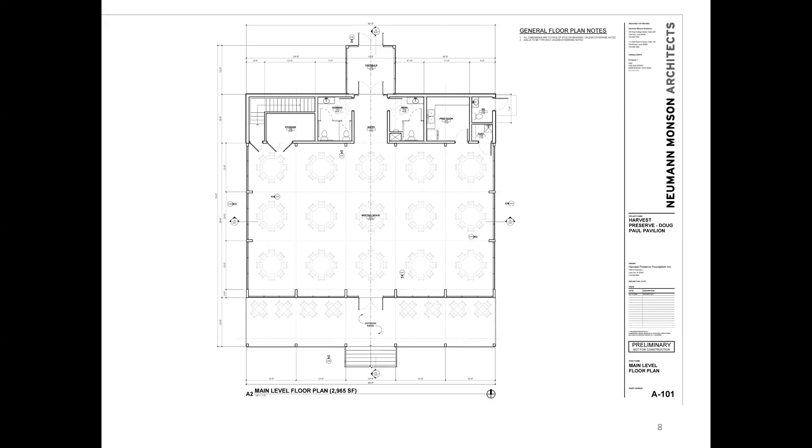Here's a look at the floor plan for the main level. This is intended to be a meeting space with also providing restrooms and storage area, as well as the screened porch.

Here's a look at the lower level of the plan. The building is proposed as a walkout basement, which will be storage area as well.

The role of the Board of Adjustment: the Board of Adjustment is charged with approving with conditions, or denying the application based on the facts presented. To approve the special exception, the board must find that it meets all applicable approval criteria.

For this we use two sets of standards: specific standards pertaining to the use requested, and general standards that we use for all special exceptions. For our specific standards, we'll use 4B4D17 of the code, which is for a religious or private group assembly in the IDRS zone.

The first standard is related to the required setbacks. The following setbacks are required in lieu of the setbacks specified in the base zone: the proposed building must be set back 20 feet from the front lot line, 20 feet from the side, and 50 feet from the rear lot line.

However, the board may reduce these setbacks subject to the approval criteria for setback adjustments as specified in subsection 14-2A-4B5, our adjustments to principal building setback requirement subsection of this title.

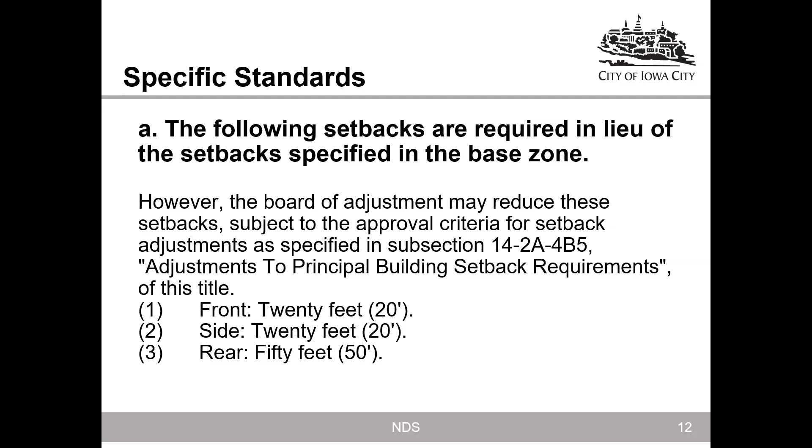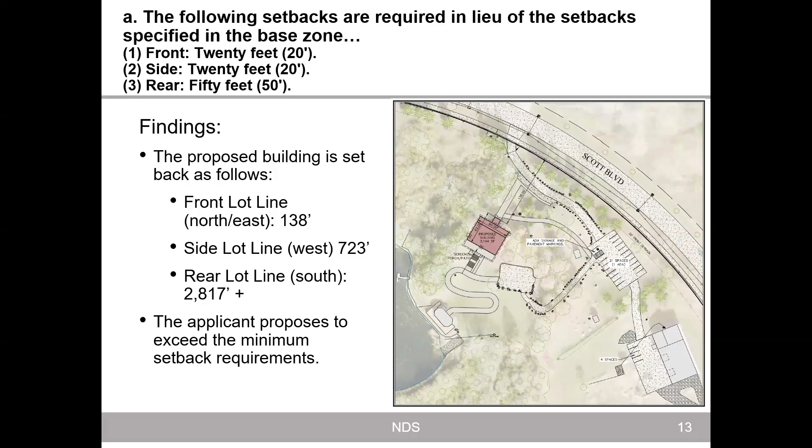The proposed building is set back 138 feet from the front lot line, 723 feet from the side lot line, and over 2,800 feet from the rear lot line. So the applicant proposes to exceed the minimum setback requirements.

The next standard: the proposed use will be designed to be compatible with adjacent uses. The Board of Adjustment will consider aspects of the proposed use, such as the site size, types of accessory uses, anticipated traffic, building scale, setbacks, landscaping, and the location and amount of paved areas.

The board may deny the use or aspects of the use that are deemed out of scale, incompatible, or out of character with surrounding residential uses, or may require additional measures to mitigate these differences. Additional requirements may include, but are not limited to, additional screening, landscaping, pedestrian facilities, setbacks, location and design of parking facilities, and the location and design of buildings.

Staff find that the use would provide an indoor meeting space and restrooms for its members for the purpose of education, training, leisure, and shelter. This private group assembly use is primarily for use by its members, typically restricts access to the general public, and cannot be rented to commercial office uses or for events held by the general public.

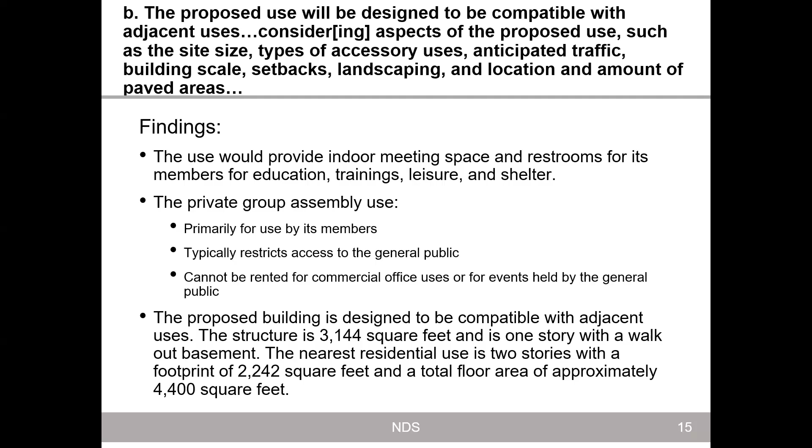The proposed building is designed to be compatible with adjacent uses. The structure is 3,144 square feet and is 1 story with a walkout basement. The nearest residential use is 2 stories with a footprint of 2,242 square feet and a total floor area of approximately 4,400 square feet.

We also consulted with transportation staff, who determined that the proposed use and associated traffic will not overburden Scott Boulevard, noting that, according to Iowa state data, the street currently carries approximately 5,100 vehicles per day and has the capacity to exceed 15,000 vehicles per day.

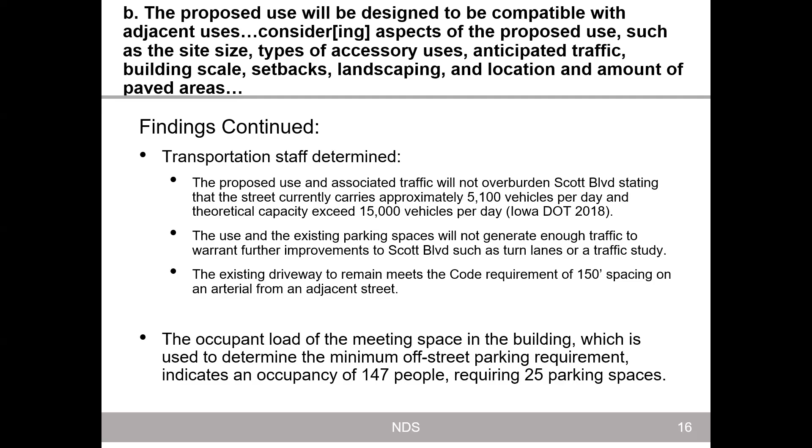Transportation staff also found that the use and the existing parking spaces will not generate enough traffic to warrant further improvements to Scott Boulevard, such as turn lanes or a traffic study. The existing driveway is set to remain and meets the code requirement of 150 feet spacing on an arterial from an adjacent street. Lastly, the occupant load of the meeting space in the building, which is used to determine the minimum off-street parking requirement, indicates an occupancy of 147 people, which requires 25 parking spaces.

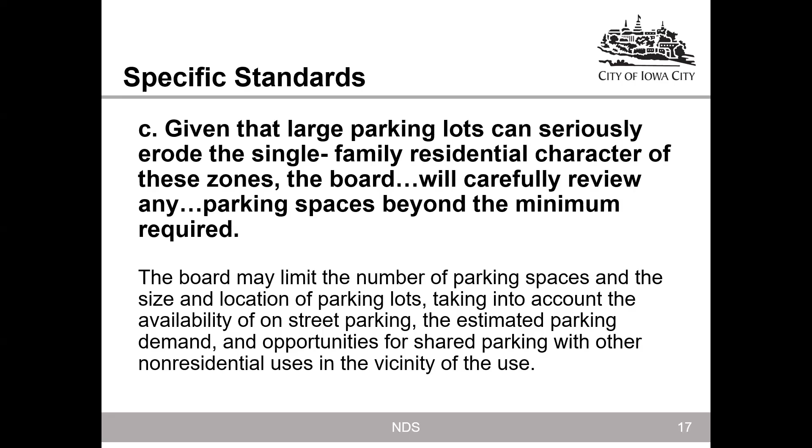The next standard: given that large parking lots can seriously erode the single-family residential character of these zones, the board will carefully review any parking spaces beyond the minimum required. The board may limit the number of parking spaces and the size and location of parking lots, taking into account the availability of on-street parking, the estimated parking demand, and opportunities for shared parking with other non-residential uses in the vicinity of the use.

The proposed use requires a minimum of 25 parking spaces. Parking spaces for a religious or private group assembly use is determined by the largest room's occupancy, which is 147 people. The property contains 2 existing paved areas that are capable of being striped for the required 25 parking spaces.

The existing driveway located along the northeast side of the property will be used. No improvements to the drive are proposed as part of this application. Bike parking will also need to be provided and reviewed during the site plan review.

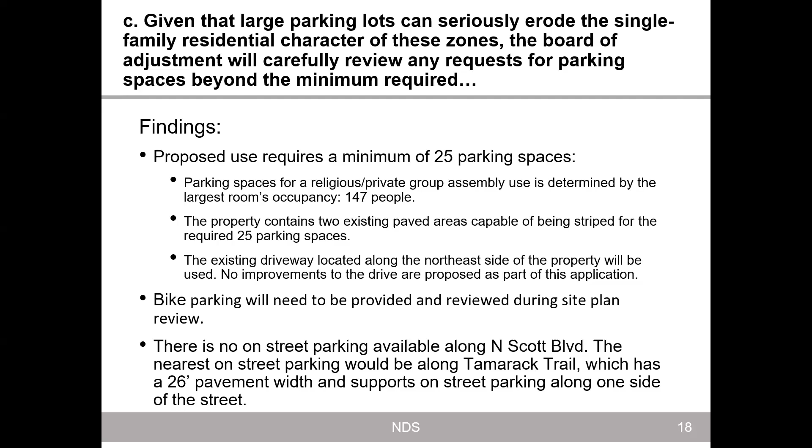There is no on-street parking available along North Scott Boulevard. The nearest on-street parking would be along Tamarack Trail, which has a 26-foot pavement width and supports on-street parking along one side of the street.

The next standard: the proposed use will not have significant adverse effects on the livability of nearby residential uses due to noise, glare from lights, late night operations, odors, and litter. The closest residential property from the proposed use is located 723 feet to the west and separated by woodlands.

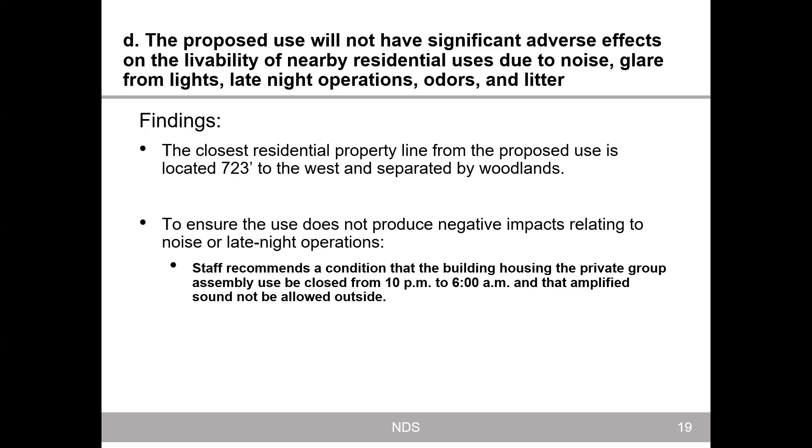To ensure the use does not produce negative impacts relating to noise or late night operations, staff is recommending a condition that the building housing the private group assembly use be closed from 10 p.m. to 6 a.m. and that amplified sound not be allowed outside.

Single-family and ID-RS zones are in the low illumination district, which is the lowest lighting district within our code. However, the ID-RS zone properties are not subject to the same lighting restrictions as single-family uses, and due to the proximity to existing single-family uses and the specific approval criteria that the use be designed to be compatible with adjacent uses, staff is recommending the condition that any future lighting be subject to the standards of 14-5G-3, which is our standards for single-family and two-family uses to ensure compatible lighting designs.

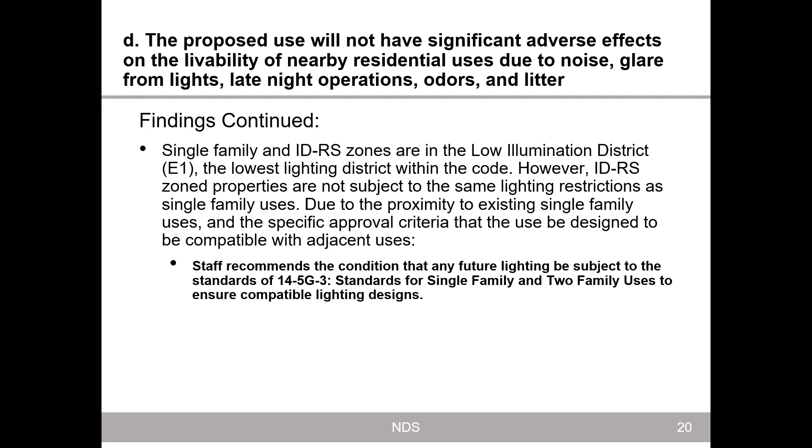The next standard is related to building additions and accessory structures. The building official may grant approval for the following modifications to a private group assembly use without approval from the Board of Adjustment. This section is not applicable because the proposed use is new and a special exception is required.

The final standard here is if the proposed use is located in a residential zone or in the central planning district, it must comply with the multifamily site development standards as set forth in section 14-2B-6 of this title. We find that the proposed use is located within an interim development zone, which is outside of the central planning district and not subject to the multifamily site development standards.

That brings us to our general standards that we use for all special exceptions. First, the board must find that the specific proposed exception will not be detrimental to or endanger the public health, safety, comfort, or general welfare.

Staff find that the proposed building will generally be of a comparable scale to surrounding residential uses, and the applicant proposes an increased setback to maintain separation from existing development.

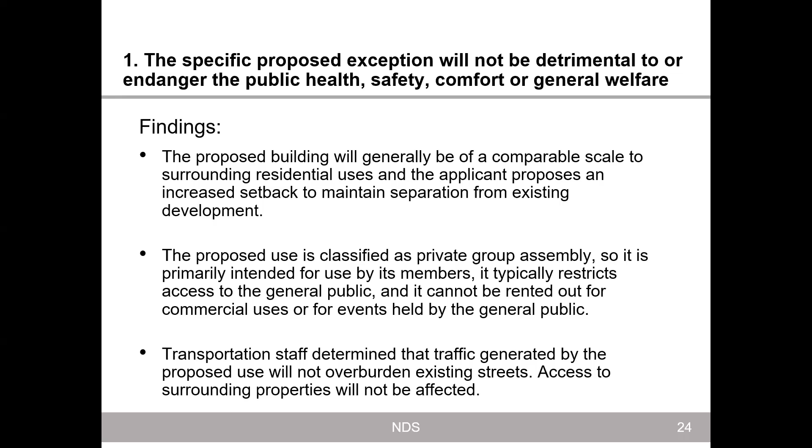Transportation staff also determined that traffic generated by the proposed use will not overburden existing streets, and access to the surrounding properties will not be affected.

Staff also find that the proposed building would provide an amenity to enhance the visiting experience for members, programs, and camps, while also acting as a safety shelter when necessary.

Conditions for noise and lighting have been proposed to ensure the proposed use remains compatible with surrounding developments so as not to impede on the health, safety, comfort, or welfare of the public.

Next standard: the specific proposed exception will not be injurious to the use and enjoyment of other property in the immediate vicinity and will not substantially diminish or impair property values in the neighborhood.

Our findings: the proposed use will not impact the ability of neighbors to utilize and enjoy their properties. The proposed building is located approximately 723 feet from the nearest residential property line to the west.

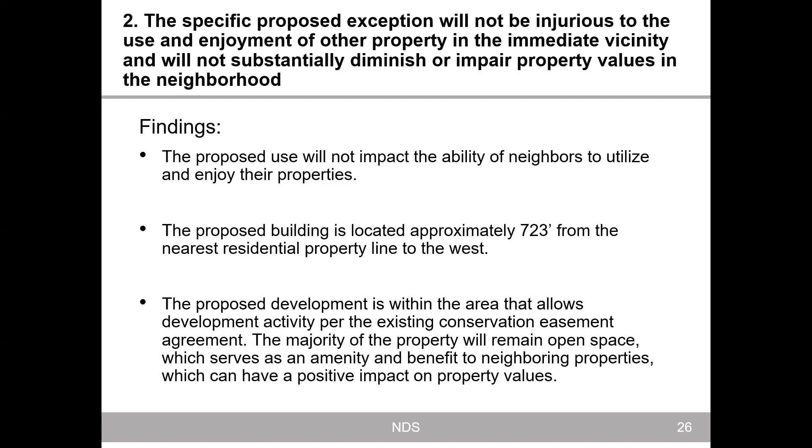The proposed development is also within the area that allows development activity per the existing conservation easement agreement. The majority of the property will remain open space, which serves as an amenity and benefit to neighboring properties, which can have positive impacts on property values.

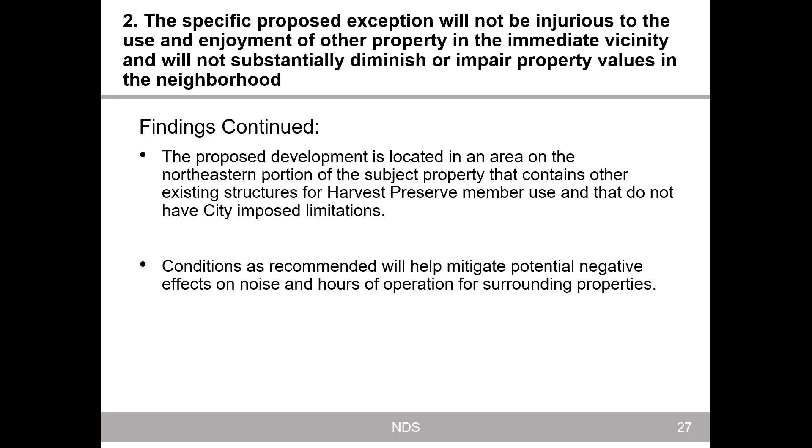Staff also find the proposed development is located in an area on the northeastern portion of the subject property that contains other structures for Harvest Preserve member use and that do not have city-imposed limitations. Conditions, as recommended, will help mitigate potential negative effects on noise and hours of operation for surrounding properties.

So the next standard: establishment of the specific proposed exception will not impede the natural and orderly development and improvement of the surrounding property for uses permitted in the district in which such property is located.

The residential neighborhood to the west is nearly fully developed with residential uses. Land to the north and east of the subject property remains undeveloped. The development of this land will occur as utilities are extended and development continues from the west.

The proposed use will also be set back 723 feet from the existing residential neighborhood and be compatible in scale. The conditions, as recommended, mitigate potential effects for surrounding properties.

The next criteria: the board must find that adequate utilities, access roads, drainage, or necessary facilities have been or are being provided. The subject property has access to city utilities and will extend utilities to serve the new building. There's also an 8-foot wide sidewalk existing along the property's North Scott Boulevard frontage, and pedestrian access for visitors of Harvest Preserve through on-site trails. Lastly, a large portion of the subject property is green space, which allows for absorption of stormwater runoff.

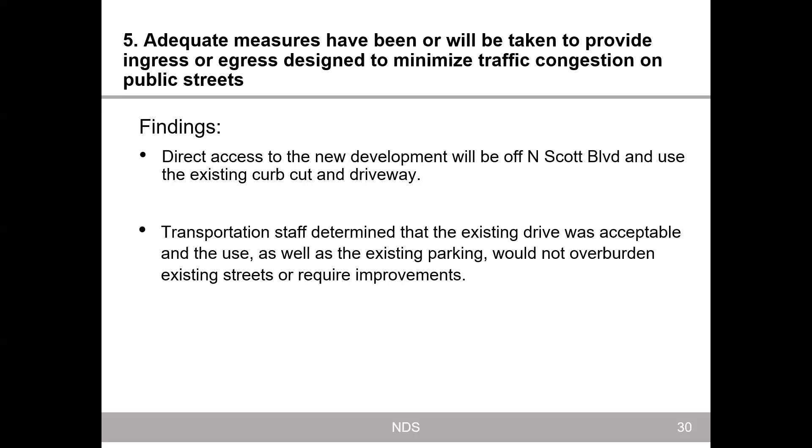The next standard: adequate measures have been or will be taken to provide ingress or egress designed to minimize traffic congestion on public streets. Direct access to the new development will be off North Scott Boulevard using the existing curb cut and driveway. Transportation staff determined that the existing drive was acceptable, and the use and existing parking would not overburden existing streets or require improvements.

The next criteria: except for the specific regulations and standards applicable to the exception being considered, the specific proposed exception in all other respects conforms to the applicable regulations or standards of the zone in which it is located. The proposed use and development meet all applicable code standards of the ID-RS zone.

And that brings us to our last standard: the proposed exception will be consistent with the comprehensive plan of the city as amended. Starting with the future land use map, the comprehensive plan shows this area as conservation design. We also look to the Northeast District Plan, which identifies this property as the Bluffwood neighborhood.

On page 27 of the comprehensive plan, it notes that conservation design is appropriate in areas containing sensitive features, meant to balance protection of sensitive natural features with the development rights of property owners. By clustering development on more buildable portions of the property, natural areas can be preserved. The proposed use and building would be located in the northeast corner of the property, away from sensitive areas and in a designated buildable area per the conservation easement.

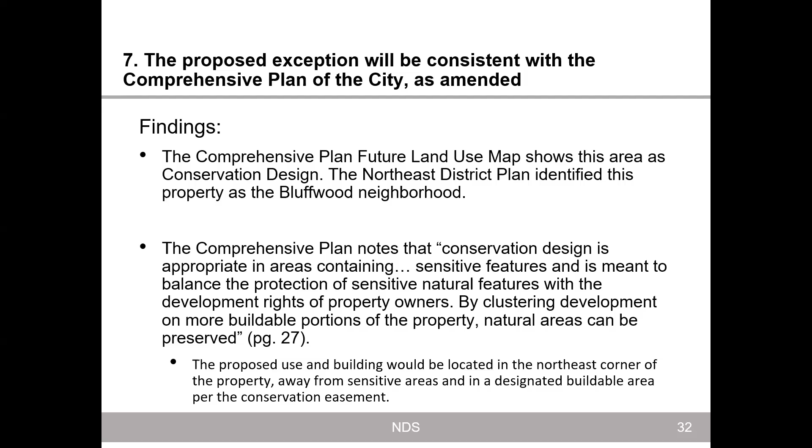Moving on to the Northeast District Plan, page 8 states a goal to use conservation design principles to locate streets, utilities, and structures in a way that minimizes disturbance to natural features.

Although the street network is currently built out, in recent years city utilities have been extended to a location more suitable to limit disturbance to natural features while providing the property with proper utilities.

Lastly, page 8 of the Northeast District Plan also has the goal to treat environmentally sensitive areas as amenities. The Harvest Preserve Foundation has placed a portion of its 100 acres into a private conservation easement for the long-term protection of natural features, with the intent of raising public awareness, appreciation, and participation. The proposed use and building would provide an indoor space intended to further support and enhance the nature amenities and those who visit.

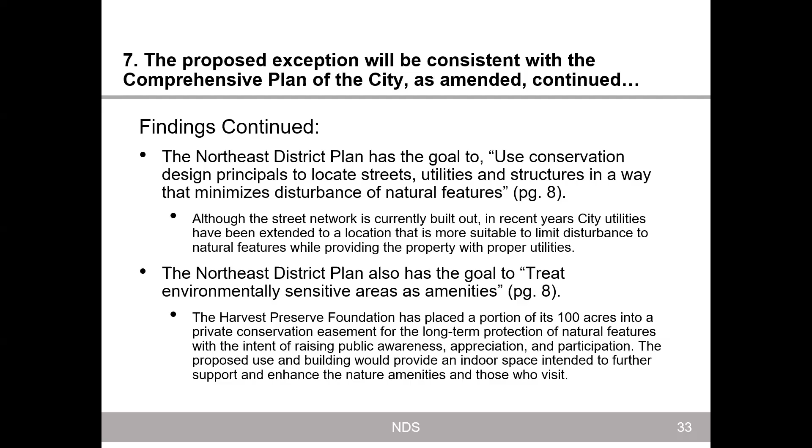Staff received 2 pieces of correspondence following publication of the agenda packet. Both of these were in opposition, and there are hard copies available.

That brings us to our staff recommendation. Staff recommends approval of EXC26-0001 to allow a private group assembly use in an interim development single-family residential zone for the property located at 1645 North Scott Boulevard, subject to the following conditions. First, general compliance with the site plan dated April 8th, 2026 in terms of the location of the building, parking, and the size and scale of the proposed building.

Second, the building must be closed between the hours of 10 p.m. and 6 a.m. Third, no amplified sound shall be allowed outdoors. And last, future lighting be subject to the standards of 14-5G-3, our standards for single-family and two-family uses, to ensure compatible lighting designs. And that concludes the presentation. I'll turn it back over to the board.

Are there any questions from the board to city staff? Are the grounds open beyond 10 p.m., or how does that work? That might be a good question for the applicant to answer, but their website generally says dawn to dusk. I see, yeah.

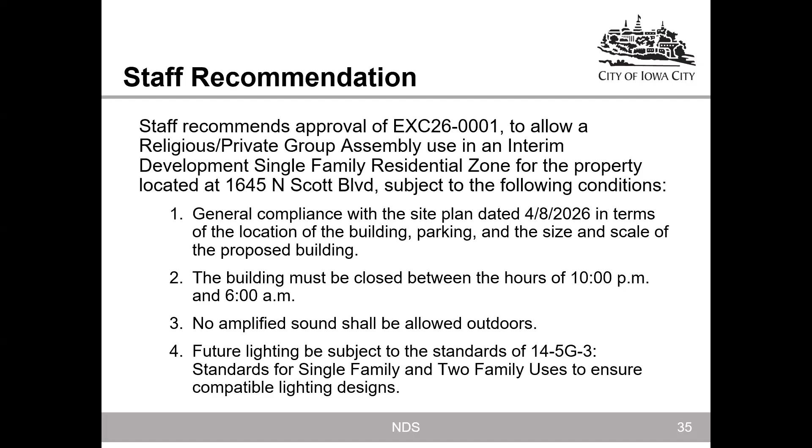I have a question about the parking spaces. The plan shows 4 spaces separated from the 21 spaces. Is there a building connected to those 4 separate spaces? Let me pull up the site plan. There is a building there. Is it something that requires its own parking spaces? I think it's an accessory structure to the open space use, possibly a barn that was relocated to that site, and the applicant can probably speak to that as well.

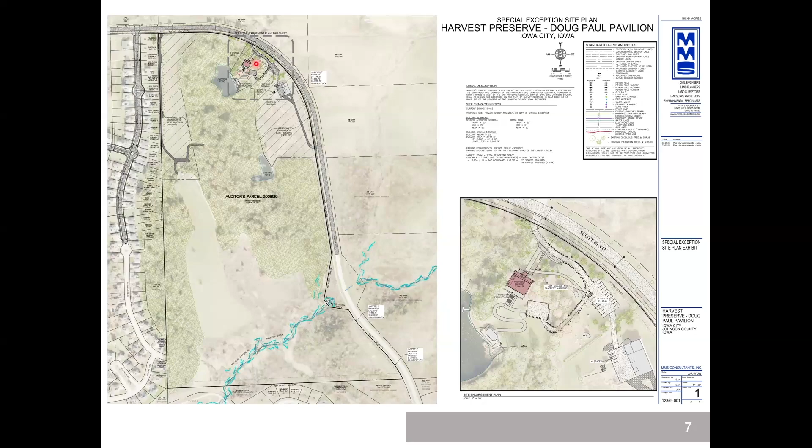It looks like another change was the location of the building from 2024. It was moved, is that right? The original application that staff received in 2024 had the building over on the west side somewhere. And through the Good Neighbor meeting and feedback from the residents, the applicant ended up moving the building over to the east side. So when it was approved by the board, it was in this location on the east side. Thank you. Any other questions for staff?

Okay, I will now ask the applicant to present your proposal.

Hi, my name is Brock Heller with MMS Consultants. I'm the applicant on behalf of Harvest Preserve. Thank you, Lisa, for the presentation, and thanks for your time, board. Some of the questions that were just brought up, I can address.

As far as the hours of operation, there potentially could be overnight camps at certain times in the summer. That's the only main thing that I can think of as far as those hours being different. And with staff's recommendation of the 10 p.m. to 6 a.m. closure, the Harvest Preserve would be accepting of that as well.

There is a restroom that will have access from the outside, not internal to the building, so members will be able to access that restroom facility without the building itself being opened. It's my understanding that the building isn't intended to be open at all times, and that the Harvest Preserve board would only open it for certain occasions.